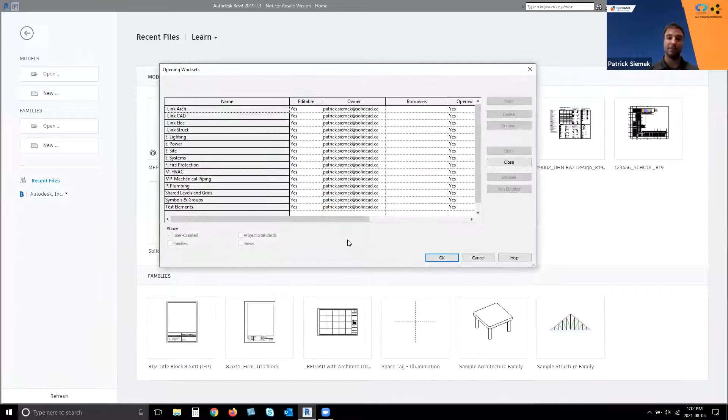As we start opening the starter project, detaching it from Central, we have all the different work sets that are part of the pack itself, which are modifiable. Working our way through, always detaching and preserving the work sets, keeping the work sharing function on.

With the productivity pack open, we're going to start with the splash screen, a starting page showing some information about the project. We could always add project information like the project name, address, client or owner, or any other information regarding the project itself.

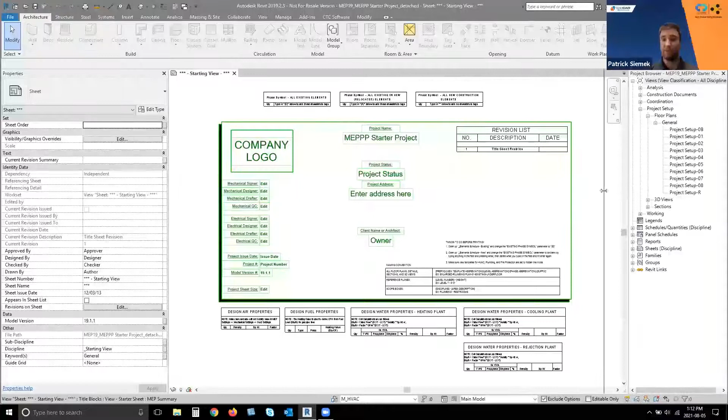The first thing we'll always want to do is simply save out the project. Saving our project to the proper location, keeping it simple with MEPPP webinar as my project name, making it a work sharing file, and giving it a few seconds to save.

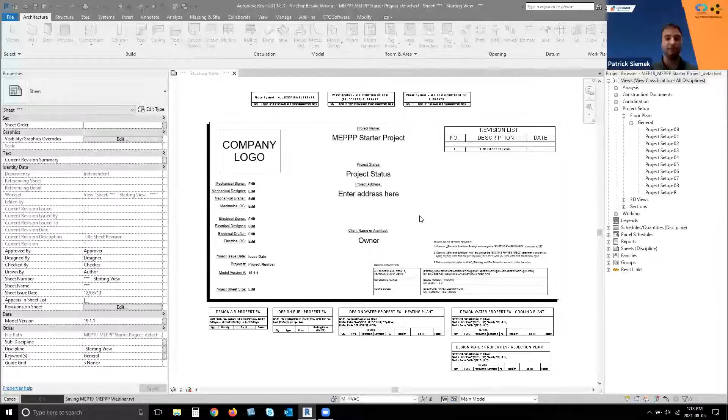One of the great things about the pack, as I mentioned, is that things are already done for you. Your views, with view templates, and the ways things are organized within the pack, are already set up for you, along with sheets.

Another thing that takes a long time when creating or starting a project is developing all the views and then placing those views onto a sheet. Multiple views along with sheets have already been created, with views already placed onto those sheets.

With the project saved out, on the right side in the project browser we have a few different view classifications. There's a process utilizing this productivity pack starting from project setup, which we're going to look at here.

We're going to go step by step, looking at how we could quickly set up a project for this webinar, and then talk a bit more about the other types of views and how they're affected by the project setup workflow.

As we start working through here, we open our view classifications. They are classified by the view classification, type of view, and discipline—general for all the different types of disciplines within the pack itself.

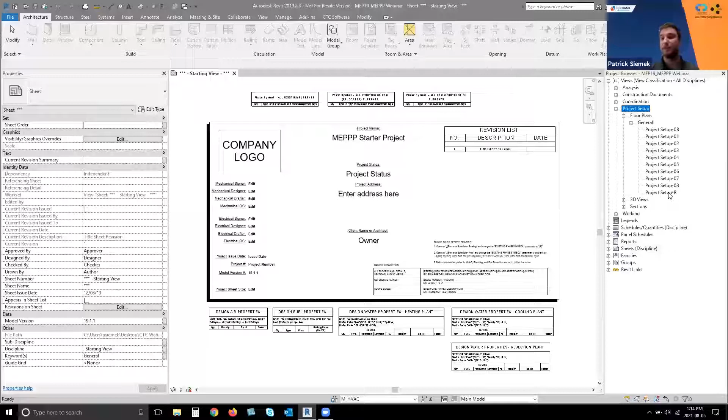Coming with the productivity pack, we already have some pre-established levels—levels 1 to 8, with a roof level and a basement level. We're going to start jumping into the project setup 01 view.

Utilizing the work sets, with our working view already inside of the floor plan, we do have scope boxes along with a few different sections. The first thing we want to do here is link in our model.

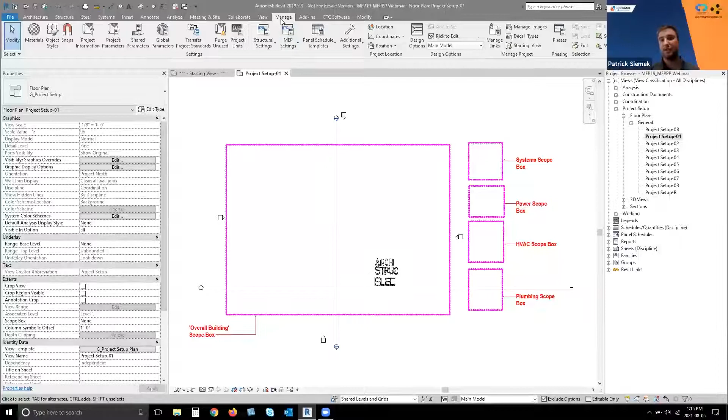Since there are already placeholders inside of this file, I go to the Manage tab and Manage Links, and all we're doing is reloading from the new location where the architectural model has been found. As I select the architectural model, it's already in place inside of the project, pinned and on the correct work set.

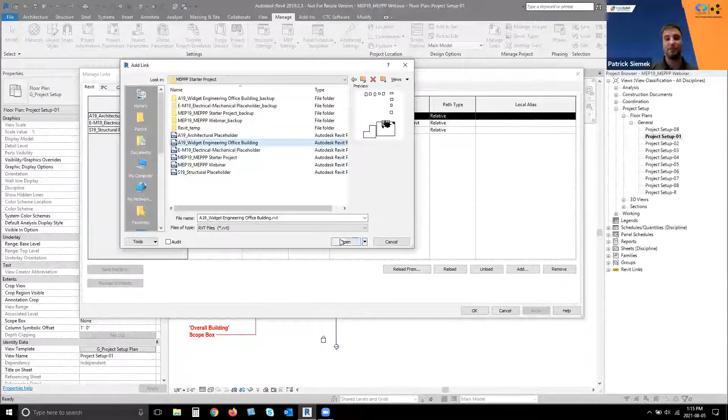Reloading the model, using my office building as an example, selecting open, and having that model placed origin to origin, as it is the default placeholder.

And as we click OK, we should see our model now into place.

Not all projects are the same, so the scope box that we have right now on the project setup view can be modified to the size of your building. What's nice about this scope box is all of the views in the construction documents, the ones being placed onto a sheet, are already affected by the scope box.

So as you manipulate the size of the scope box, if I expand construction documents as an example, here we have the different disciplines. As I start opening these different views, you'll see there's already pre-made views for you - working plans, which is our demolition or existing plans for HVAC, plumbing, mechanical piping, and so on. As I open one of these views, we can see we already have the linked file in place, along with a view template, and also that scope box applied to it.

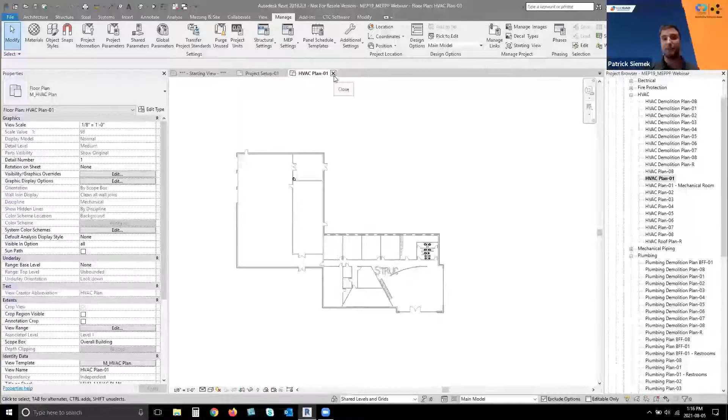So as you are working with your project setup view and start modifying your scope box, it is affecting not only just one view, but multiple views throughout your project, keeping that consistency from view to view.

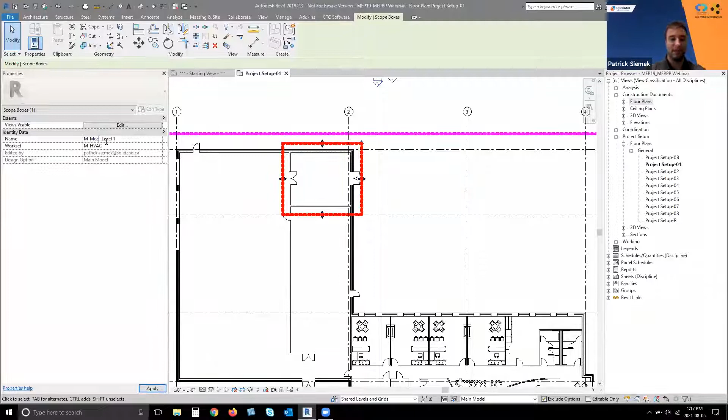So once we work with our scope boxes, we do have other scope boxes also within the package. So if we have a mechanical room, we could quickly take a scope box, align it to the appropriate area for our location. We can give the scope box a name to give an option when we go to the view - so I could come into the description, selecting mechanical room, having that into place. Now we've got a mechanical room scope box that can be applied to another view.

Same thing for other types of areas - we could use a scope box maybe for the electrical room, moving it over here, or even a plumbing one for our restrooms. So again, some elements that are already in place for us to easily modify in place to where they need to go. And again, the overall scope box is actually modifying multiple views in the package.

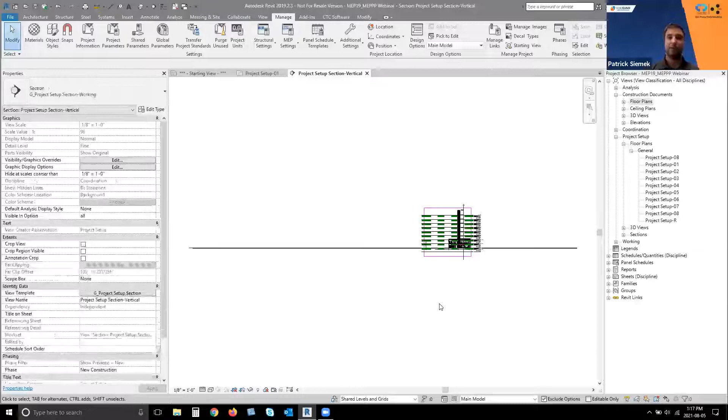Once we have the link model in place, if I go to my section view, here we'll see the linked model in place along with some predetermined levels. So inside of the productivity pack, you're going to have levels 1 through 8, the roof level and the basement level. Along with these levels come reference planes.

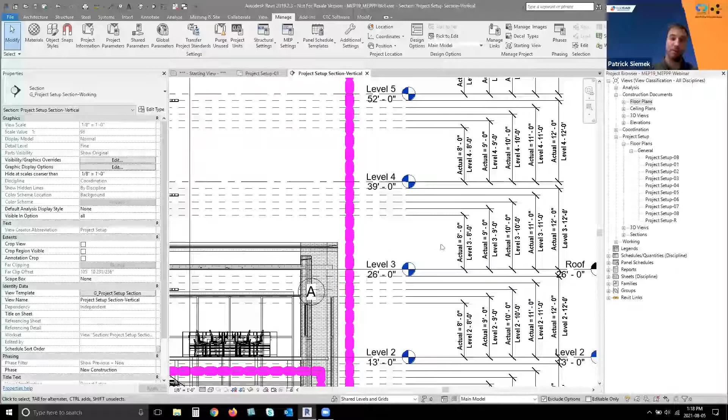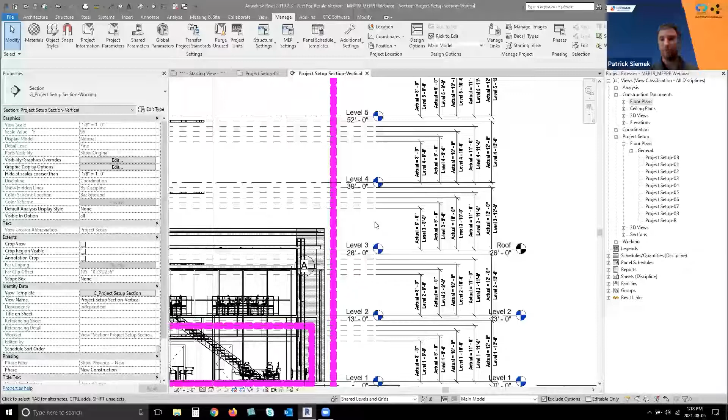So again, reference planes can be utilized for you to host your different elements too - different ways of hosting Revit content directly onto the link, onto a reference plane, or hosting it off of a level. So inside of the productivity pack, there are already reference planes with dimensions attached to them and also being named, so as you're inside of the pack, you could quickly utilize them as needed. More reference planes can be created here, but again, it's already a starting point which you don't have to create moving forward.

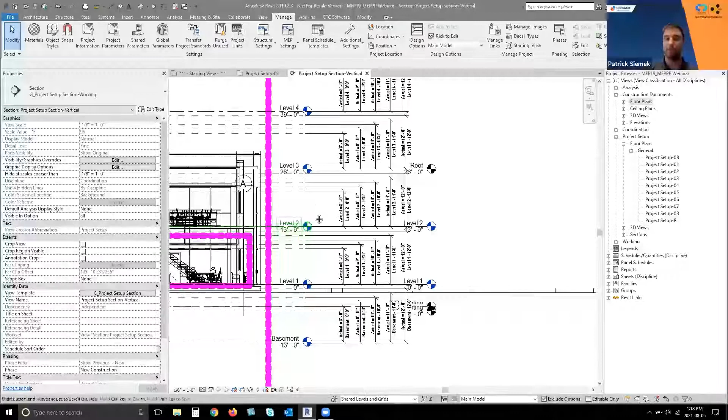Once we link in the file, we're now just going to remove any levels or reference planes that are not needed. So with the naming conventions, on the right side we have level 1, 2, and roof from the architectural link. On our side we have level 1, 2, then 3 and 4, and so on. So what I'm going to do here is start removing a few of my reference planes along with some of the levels.

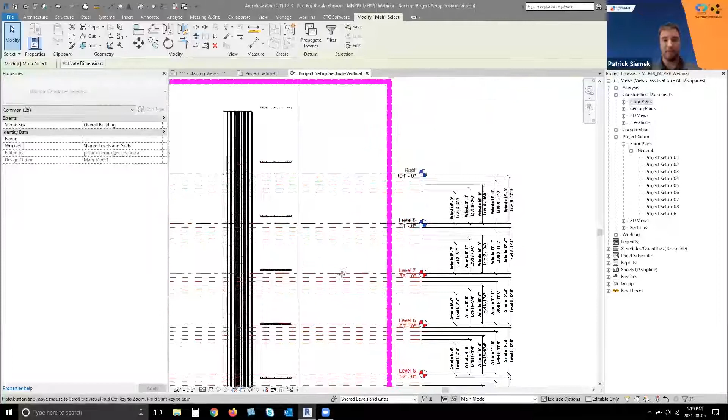As we start removing some of these elements, views that have already been created inside of your project browser - once a level is deleted, we will start to see the levels disappearing within the views themselves. So again, now we have a level 1, 2, and roof.

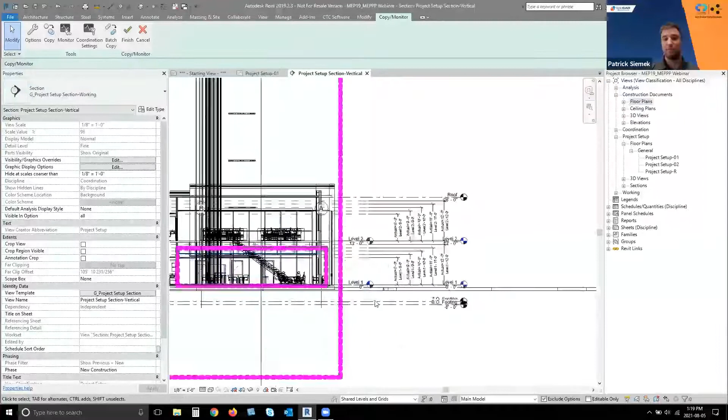And with this, we can now start using our copy monitor functionality. Collaborate tab, copy monitor, selecting from the link. What you want to do is always make sure you are naming the level names from the host or from the linked model to your host model so they match exactly, also case sensitive. So with that, by using the copy monitor function and a couple settings preset inside of the options, when I hit copy, all I've got to do is select what I want to copy over.

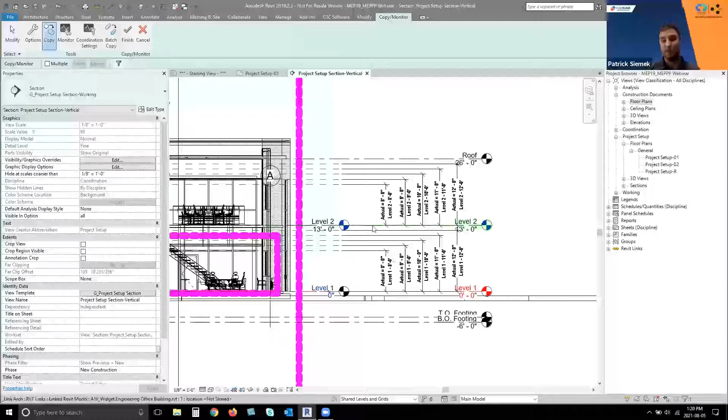Level 1 automatically will not add a new level, but it's monitoring it since it's the exact same name. Same thing goes for level 2. And as we look for the last one, roof, we will see that existing level at the very top of our productivity pack. Once we click roof, it automatically associates itself back to the linked roof model. Once we got the levels in place, green check mark to finish, and now we're already set to move forward.

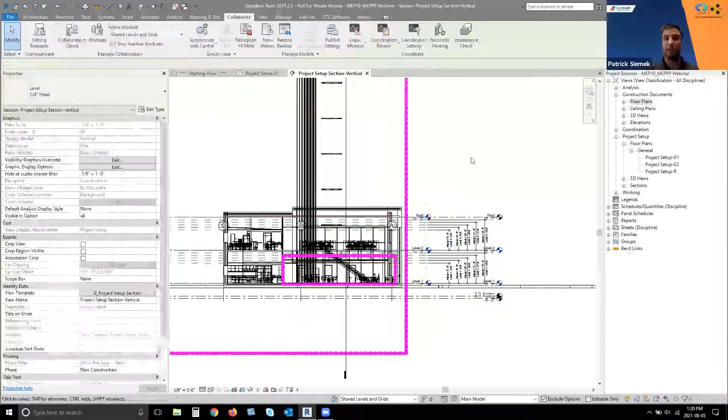With our levels in place, we could go back to the project setup view. If there are any grids, we could also do the copy monitor functionality, similar to what we did for the levels.

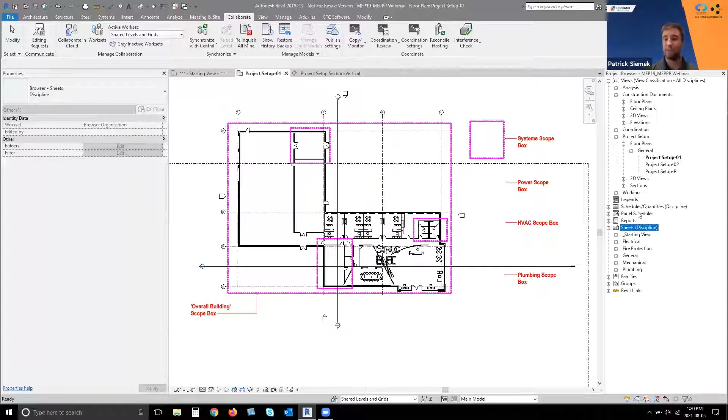As we start populating now with the project elements in place, in the project browser, we do have sheets, as I mentioned before. Sheets have already been created for you. As we expand the sheets based off of the different disciplines that we are working with, if I go to mechanical, here we have a large list of sheets already for us.

As you are starting up the project, if I go to my M101 as an example, we already have a sheet created for us, or also a view placed for us, and a few schedules.

So again, with that project setup view, modifying your scope box, adding some scope boxes or moving them around, they're always updating the views in our project browser at the top, but then those views that have been placed on the sheet are also being updated at the same time.

The only thing we would have to do here with the project setup is remove any other, say, sheet views that are not needed. So again, just cleaning up a few of these locations of the sheets, which I'll kind of just do a few over here, to have a more clean sheet layout.

Along with the sheets themselves, we have also sheets with schedules already applied to them. So inside of the starter pack, there are multiple schedules ready for you to use.

As I expand schedules and quantities, we have our different disciplines. Expanding, I could do, since I'm on HVAC here, expanding mechanical, opening HVAC. Again, a list of different types of views. So again, we do have design schedules versus construction document schedules.

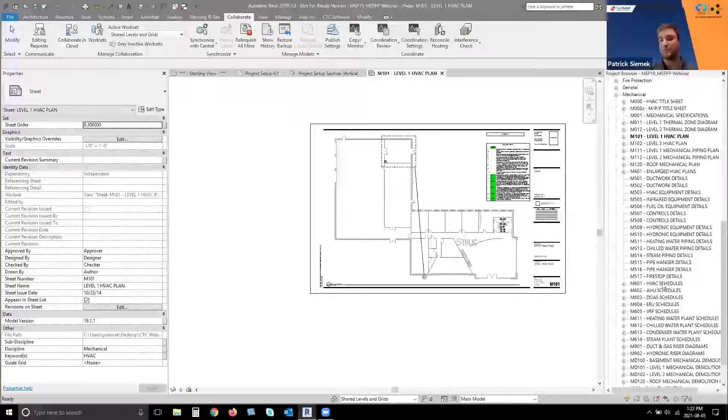Schedules that have already been created have also been placed onto a sheet. So as I double click onto M601, here we could already see a sheet established with a few different schedules. So once again, all of that upfront work, all of that startup of creating the sheets, adding the schedules, or placing the views onto the sheet have already been done for you.

So once we have the linked model into place, we have some of the sheets being cleaned up. The next kind of steps, which would be for the project startup, is already just getting into starting to model. So again, just to kind of talk about a little bit here, project setup, and we got our working views. This is where we're doing the modeling.

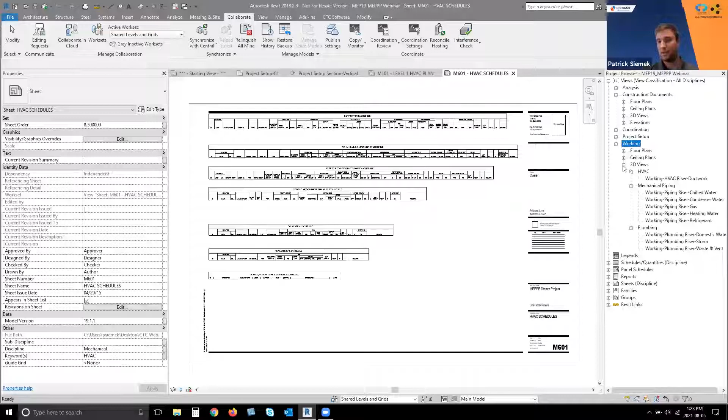As mentioned, inside of this project or inside of this productivity pack, every single view has a view template assigned to it, so there is a specific workflow that's going to be done. Your working views, that's where you do all of your modeling. So again, if I quickly just jump into a working view, and I will go to a ceiling plan, we can start to work in here. As we kind of zoom in and work with our projects, with our views in place,

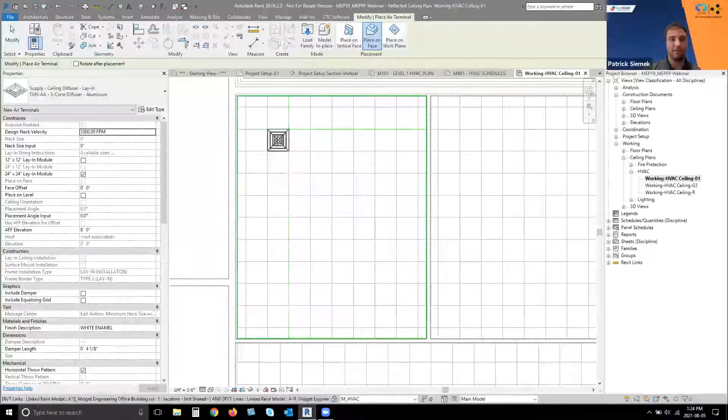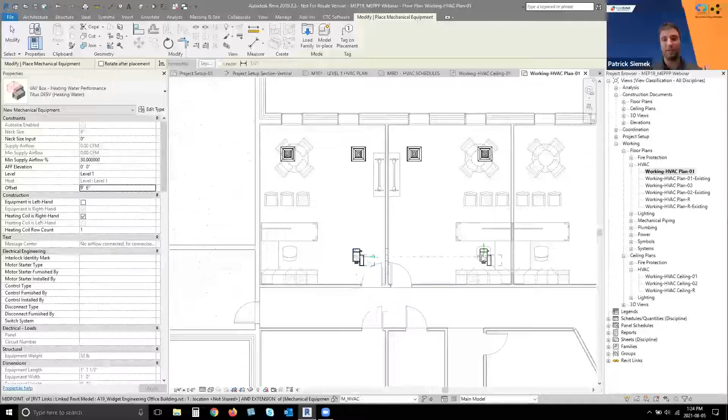I could start adding a few of the components as needed. So again, applying a few of our air terminals inside of our spaces. With those air terminals, I could add a VAV box, giving it a specific height. So again, quickly modifying and placing our elements in with already the views created for us.

As we start to kind of, maybe I'll come into here, placing these items in. Maybe we could change this type. And then connecting our elements.

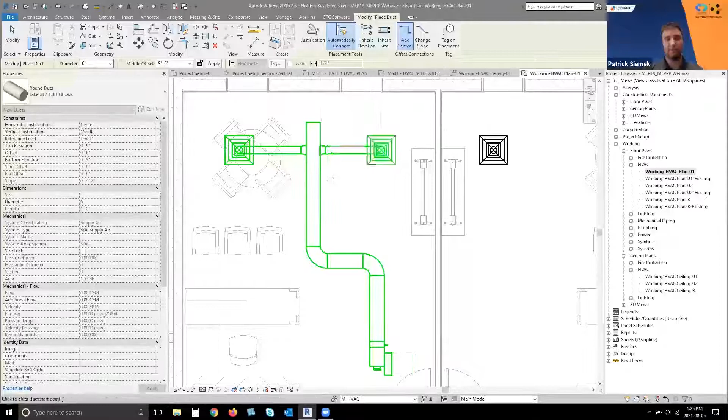Again, as we continue doing the modeling within our projects, completing the systems, working views are already created for us. As we jump back to the construction document views, those have already been created for us to do any kind of annotating towards our systems. A lot of components like tags and information are embedded inside of the content pack itself.

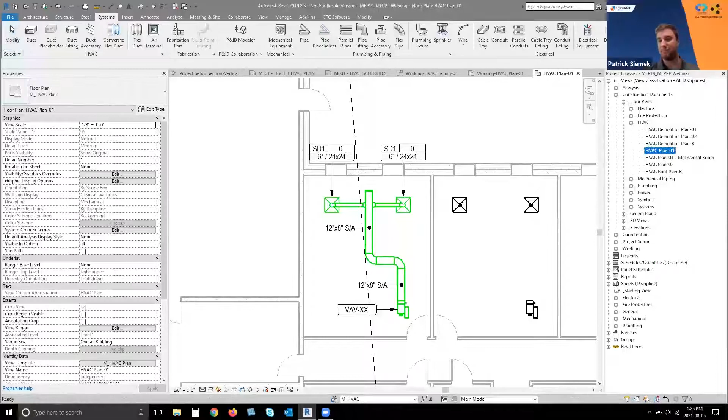With your construction document views, working through them, using your analysis views to analyze your elements, finally getting back to my sheets, and we can see quickly with a few picks and clicks, linking our elements, everything's already kind of combined as a final project. All we really need to do is start doing the modeling, start analyzing and updating any of the information that is needed.

So again, that would be a quick overview of the MEP productivity pack. Again, for your mechanical, plumbing, and electrical components from start to finish, quickly getting up and running inside of a project and having all those views, schedules, and sheets ready for you right at your hands.

So Jay, I'll pass it back to you. Any kind of questions or comments, or even adding more information about the pack.

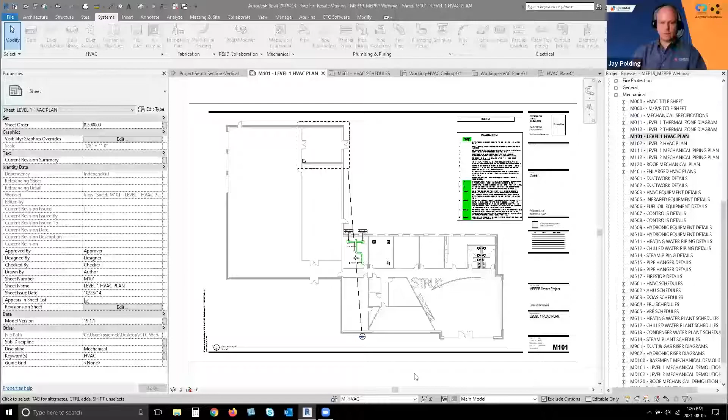Yeah, that's awesome, Patrick. Keep in mind, that's just getting started. We've really had a lot of comments from clients saying that just what he did there saves many hours of time in the startup process alone. And there's lots more we can talk about. I'm just going to review a couple other important points here.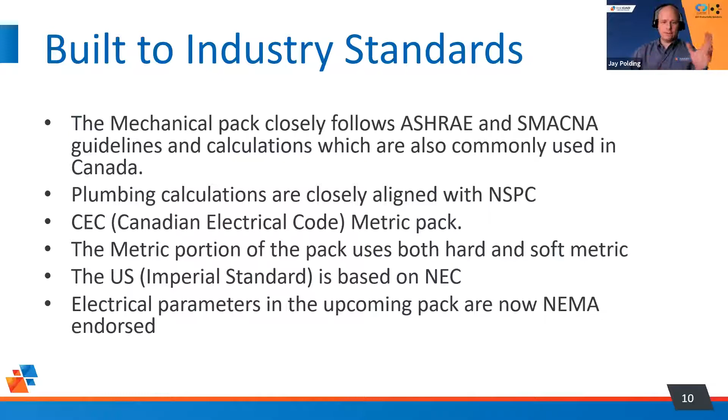The MEP pack is built to industry standards. You probably recognize a lot of these associations here, both Canadian and American, and everything is built according to these standards. There's also an Imperial and a Metric pack that are going to be released shortly.

Okay, so let's just review. The MEP Productivity Pack has been developed over the last 10 years plus and refined every year. There's an updated pack released every year in its entirety. You can just buy the upgrade if you already have it, or you can buy a new one.

The MEP content is developed by engineers for engineers, and you have not only content like those diffusers, ducts and VAV boxes that Patrick showed, but you have templates, a starter project, a sample project, training materials, and we can provide you with that training. In fact, Patrick is one of our amazing trainers on this. And it's made to industry standards, both in metric and imperial.